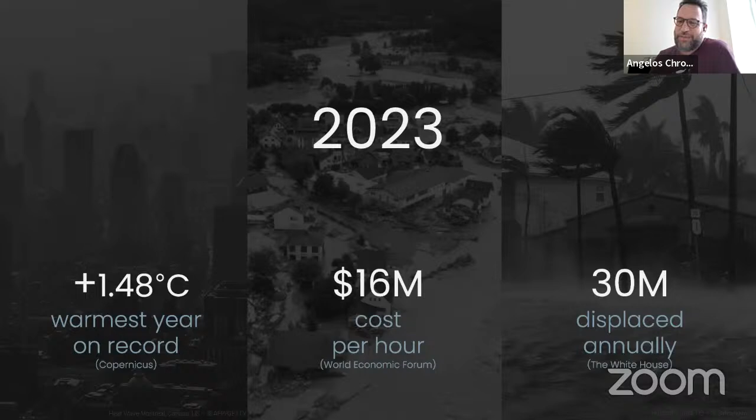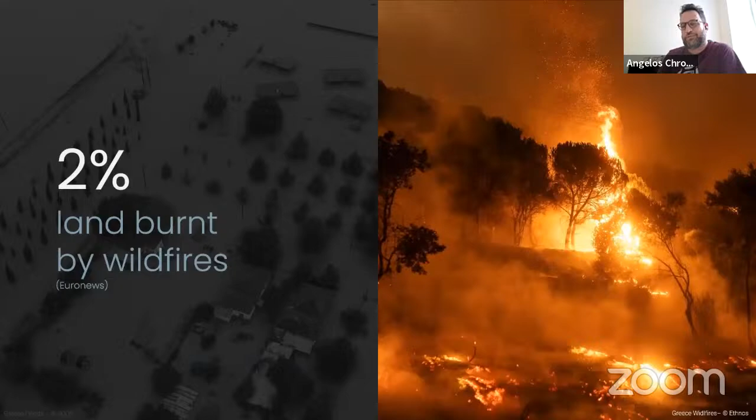We're really in trouble. I come from Greece, and I normally use these stats from last summer in Greece: we lost 2% of our land in wildfires and 5% of our GDP in floods. So we do have a problem.

I'd like to bring us back to that problem as we develop cities, and cities are the core of this problem. 75% of us will live in cities by 2050. We need to build 13,000 buildings per day by then, according to Autodesk. And buildings are still the largest contributors to climate change, with more than 35, sometimes 40%, of greenhouse emissions.

Cities occupy 2% of our land but consume 80% of the world's energy. I like this image because it focuses specifically on the buildings that are the problem. Most of you probably know the Walkie-Talkie building in London, also called the 'Scorchy-Talkie,' because it was scorching very expensive cars in the city of London, and essentially had to be adapted to stop melting cars and people's property. It wasn't the only time this happened in the history of architecture.

Viñoly made the same mistake with the Las Vegas Vdara Hotel, where people working there called it 'the death ray' - a beam that passed by the pool area and burned people, and melted plastic cups. If we're in 2010, now 2024, and we still can't figure out that a building will burn people, we have a problem.

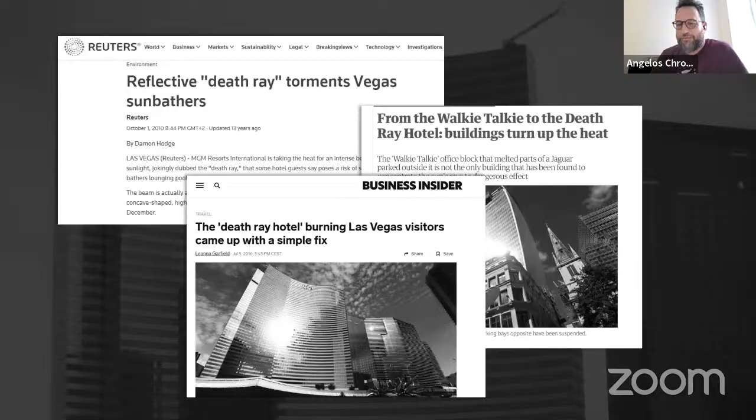I want us to go back in time a little. This is generative components, from maybe 15 to 20 years ago - probably shows my age a bit. Back when generative components were essentially the parent of Grasshopper, when it was parametric architecture before we got into the spaghetti we have today.

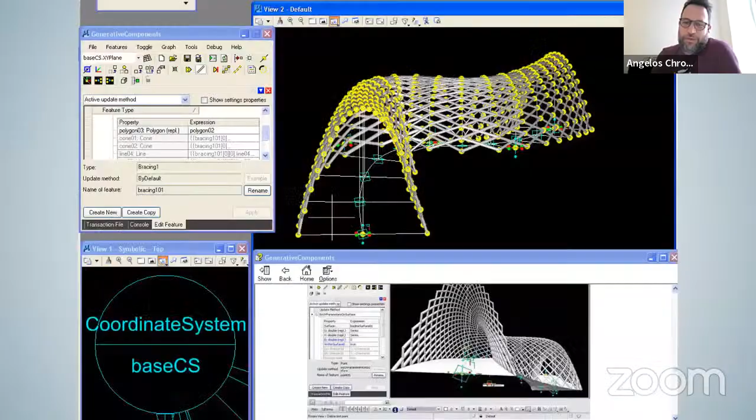So we went from here to there. This is a very interesting image from the past for me, where we have a free-form surface connected directly to a solar radiation calculation done in Ecotect - a custom GC to Ecotect link. It took me about two weeks to try to connect the two together, and it wasn't even possible. Today you go to Food4Rhino and get simulations for all sorts of things. So we've come a long way, but we still have a long way to go.

Now, when we talk about AI in architecture, it's not that relevant to me for Midjourney and visualization - it's more relevant to what we can do in terms of performance in architecture. How do we understand the impact our design has on the climate? This has been the most important driver for my career: how do we connect design to all the different climate aspects, whether it's wind, solar radiation, thermal comfort, rain, or anything else?

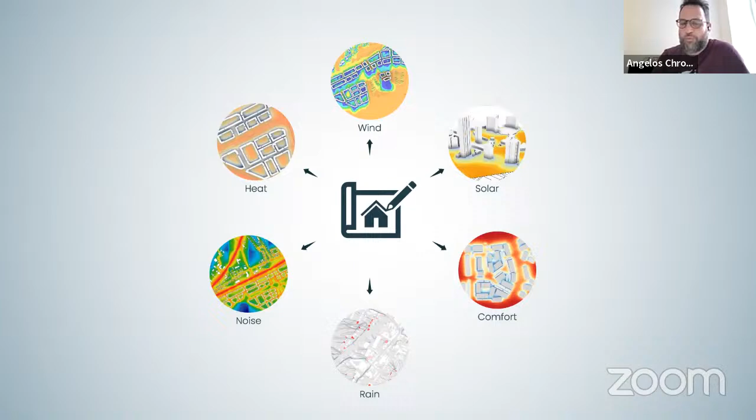That's how we came to discover the problem: these simulations aren't really connected. Even with tons of tools in Food4Rhino, you still have time, complexity, and expertise issues. Infrared.city, the startup, is essentially focused directly on this problem - making climate simulations accessible.

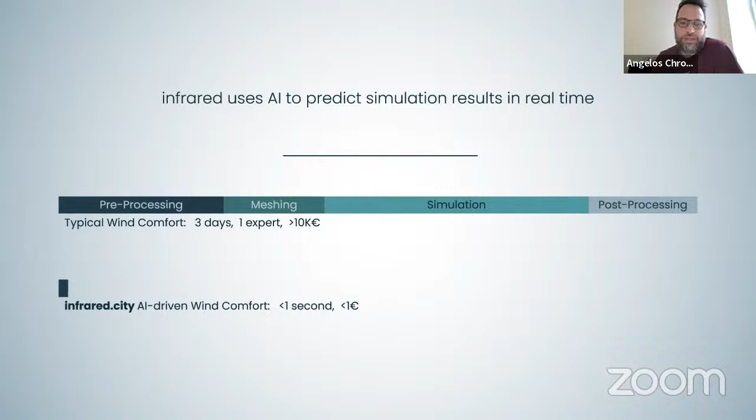A typical example: if you want to do a wind comfort simulation, it takes 3 days. We can do the same simulation in less than a second.

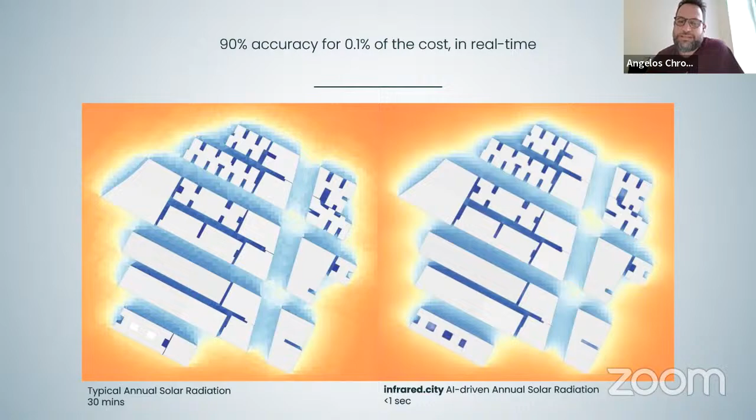This is a very interesting image for me, one of the first we developed in the project. On one hand you see a solar radiation simulation that takes maybe 30 to 40 minutes. The other is an AI prediction done instantly. What we've been developing are generative adversarial networks, GAN models, that can predict simulation results - and since then we've done a lot of work with other models as well.

Essentially what you have to do is run thousands of simulations. We create workflows where we run thousands of simulations to train a neural network to predict the simulation results. But before I continue, I'd like to go back a little to the CIL, where all of this was born.

The CIL is the lab of the Austrian Institute of Technology, where I was heading for the past 5 years, and where we developed, together with Yosha - I think it was also with you two weeks ago - a lot of these tools, as well as infrared.city. I'd like to talk a bit about how we use generative design and AI-driven design tools in the lab, and how this gave birth to infrared.

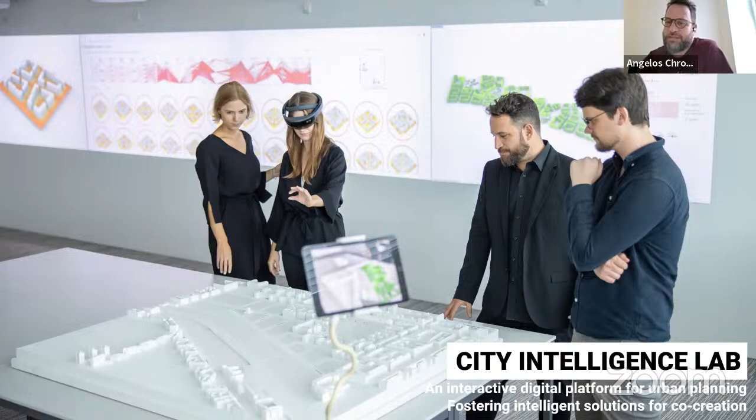The City Intelligence Lab is a laboratory within a larger research institute that tries to bring together all the different expertise and aspects: mobility, climate, transportation, and energy - all the different aspects of design together. The lab is where it all comes together through interactive, integrated tools. One thing we developed, which a lot of people might know, is the Decoding Spaces Toolbox, led by Professor Reinhard Koenig, who was also leading the group. It's a toolbox that allows you to quickly design urban forms with the help of generative design methods.

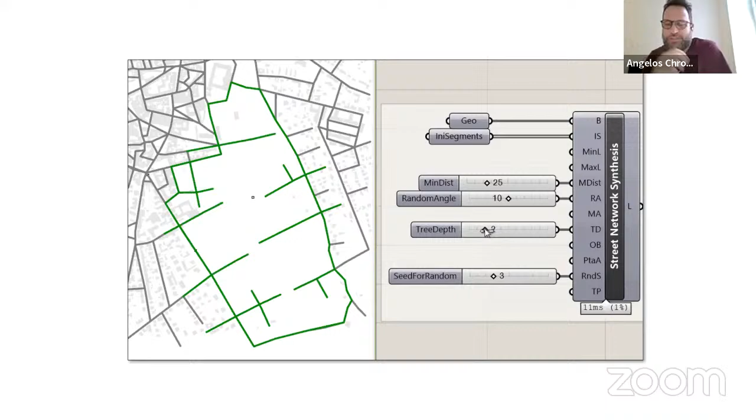So essentially you take a plot, and you can generate street layouts, you can generate typologies, you can essentially very quickly build master plans and play with urban form without really ever manually designing anything.

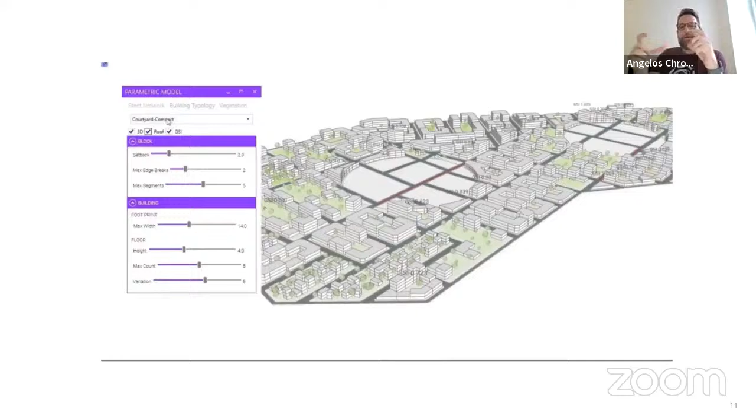This is, for me, a very interesting video that shows how you can sketch essentially urban form. This is done by Rayed Mohammed, who's now leading the computational design team at Henning Larsen. Essentially you can see how you can very quickly sketch urban forms, quickly play with designs without ever designing anything manually.

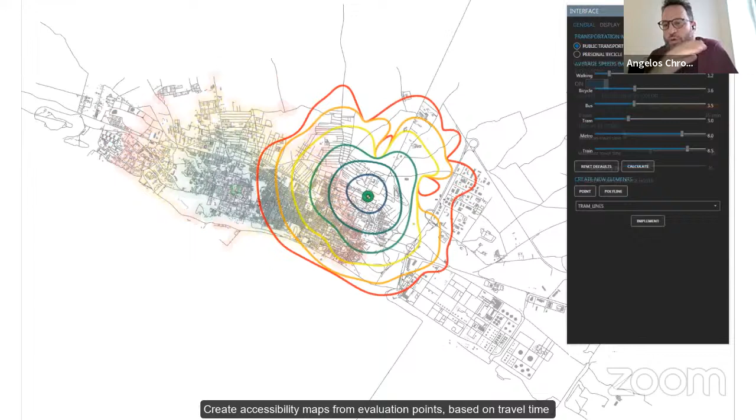We also went into mobility and accessibility, putting a point in the city, figuring out what you can access. All of these tools are developed within Grasshopper, custom tools enabling performance-driven analysis of the city, like quickly playing with transport networks, changing stations, adding, removing stations, etc.

So that essentially is what led to Infrared, this idea of having these simulation tools that take a lot of time, and how we can speed them up. That's essentially what we did with Infrared.

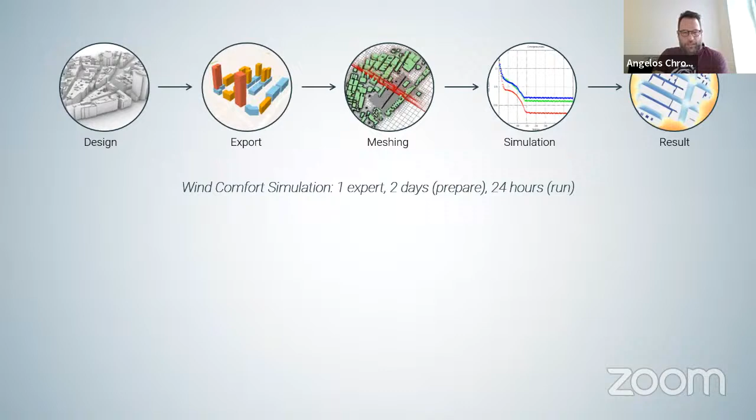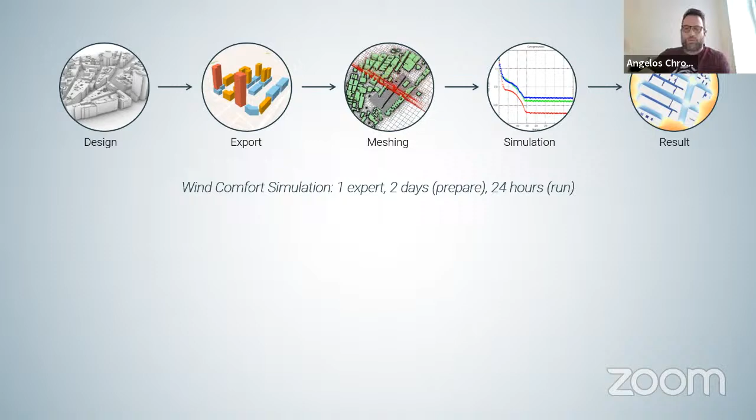We take something like a wind comfort simulation, which is a very complicated process that starts from designing, exporting, meshing, running a simulation, bringing back results, to essentially going directly from the design to the result. That is essentially what we developed.

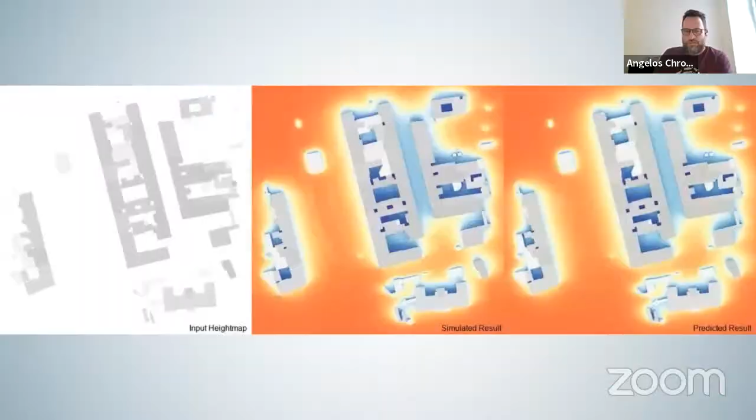So again, back to this image - how do you develop such a tool? You take cities like Vienna, you generate 3D models, you run thousands of simulations, and you train these adversarial networks to predict the simulation results.

There are a lot of such examples out there today, but we were one of the first to really use AI for this simulation prediction modeling.

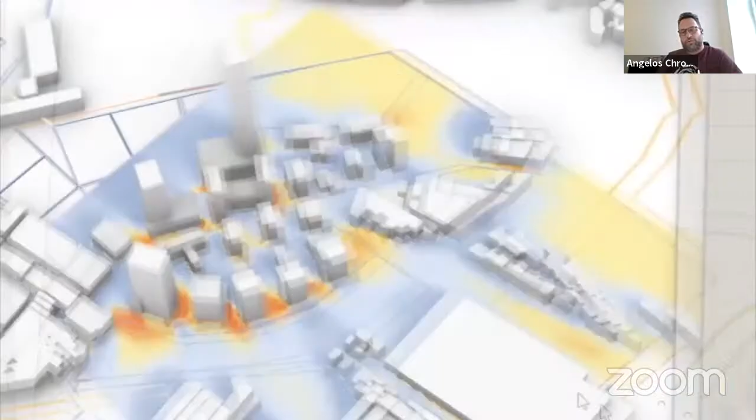I'm going to go directly into showing you a bit how Infrared looks on the different modes. Currently you can access it through the cloud, through a plugin, through the web API, or any combination of those. This is essentially a mashup of all the different methods.

This is Infrared in Grasshopper, so you can literally take a building, move it around, and immediately get a simulation result. And of course that allows you to generate massive solutions, massive design iteration.

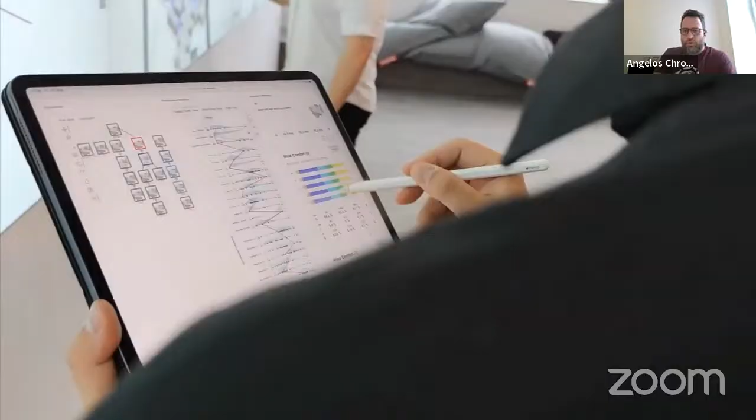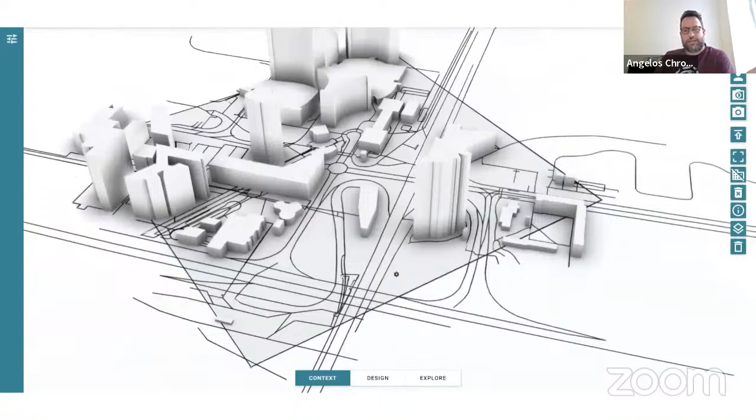This is the cloud app. You can go to a specific location, for example in Vienna International Center, where you can get data from OpenStreetMaps, very quickly select your area, select your site, and then I want to show how you can very quickly generate simulation results for wind comfort, solar radiation, etc.

For a tower, for example, in just a click of a button. And again, going back to AI, I know most people are used to seeing generative imaging of dreamy landscapes.

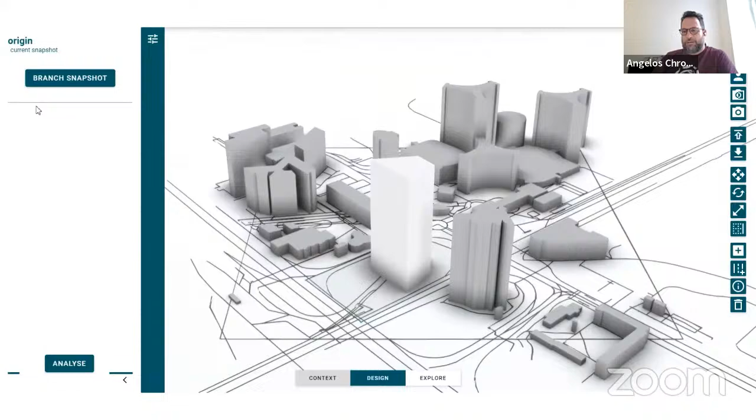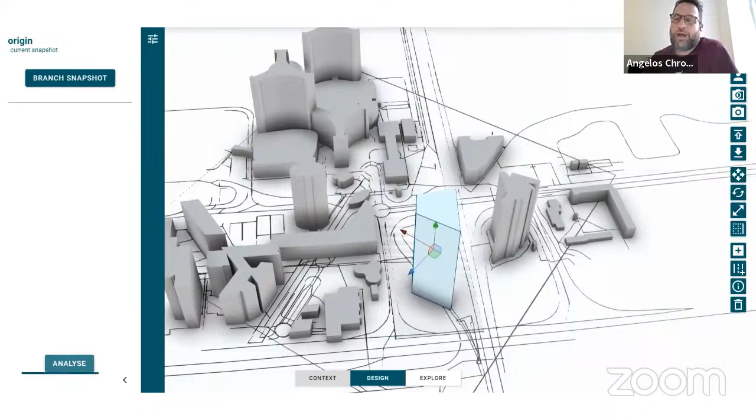But having a wind comfort analysis in a second is something we've been trying to do for a very long time in this field, and it allows you to really understand how your building impacts the environment - which is something that will happen, since this building will be built, and it will have an effect on everybody's environment.

The Grasshopper plugin, looking at parks in this case - you can move this park around using this generative design capability, where you just place a point and a park is generated. You can move a street layout, and masses are generated using decoding spaces in this case.

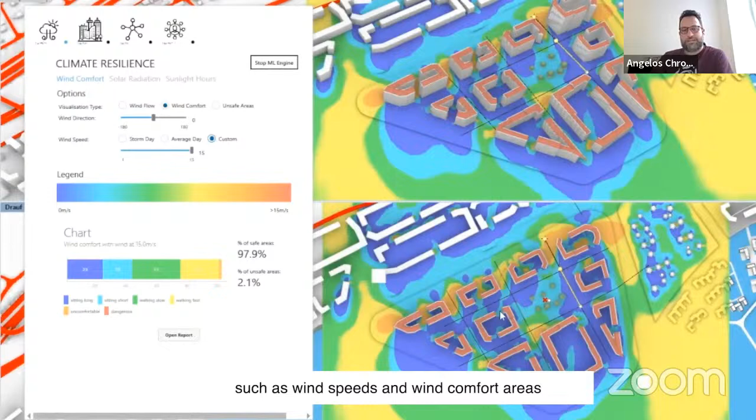And what you see here again is immediately having wind comfort results accessible to you through AI. This immediacy is again something that was not possible before. I've never seen this before in my career - I've worked 15 years now, and CFD was trying to do this for a very long time. So I was really glad to see it.

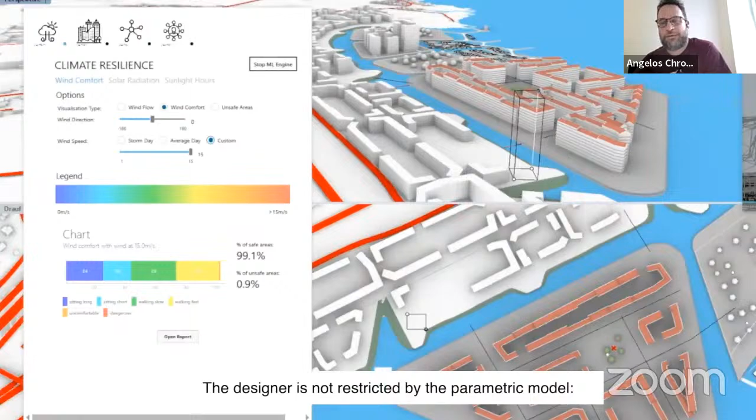You can also change buildings, add buildings, etc., and immediately see results. So that's essentially the power of Infrared. I don't want to spend too much time on it - we've also used Infrared through Speckle within Revit.

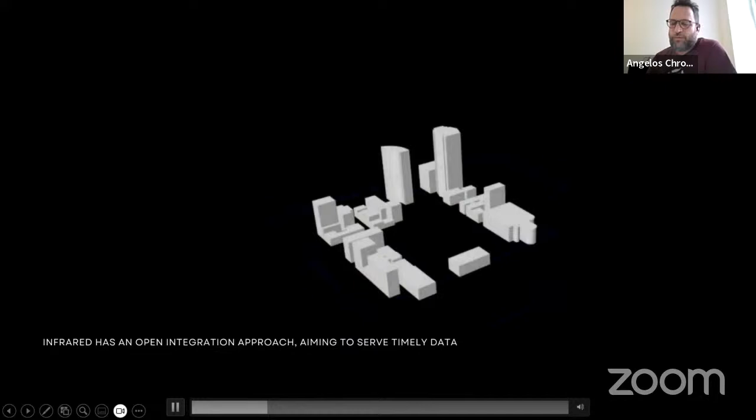I'm going to skip through this, which also shows the power of Speckle and integration of data. I don't know if you've spoken to Dimitri Stefanescu, a good friend who has done a lot for this industry's interoperability of data. Here's designing something in Revit and very quickly moving it to Infrared through Speckle and getting a simulation result. I'll skip through that since we don't have much time.

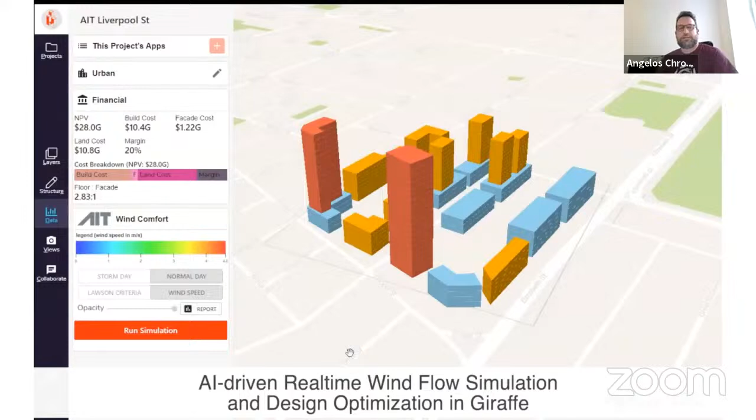Finally, we have an API, which means people like Giraffe, for example, can take our simulation and directly integrate it within their own tools. That essentially allows us to open up simulation as a service to everybody who wants to integrate simulation results. I'll show very quickly, since we're short on time, what this all means for really designing a project.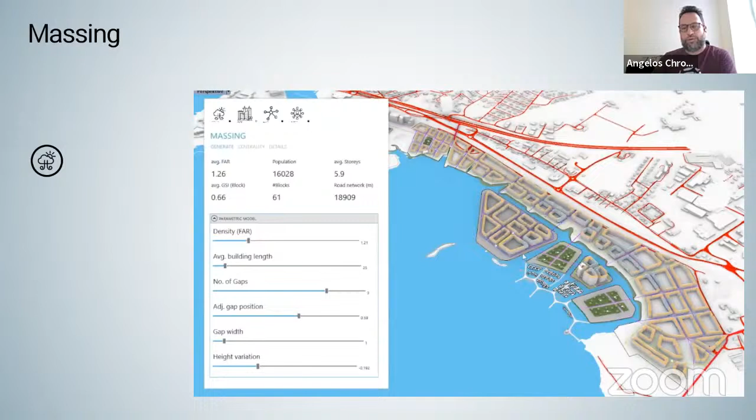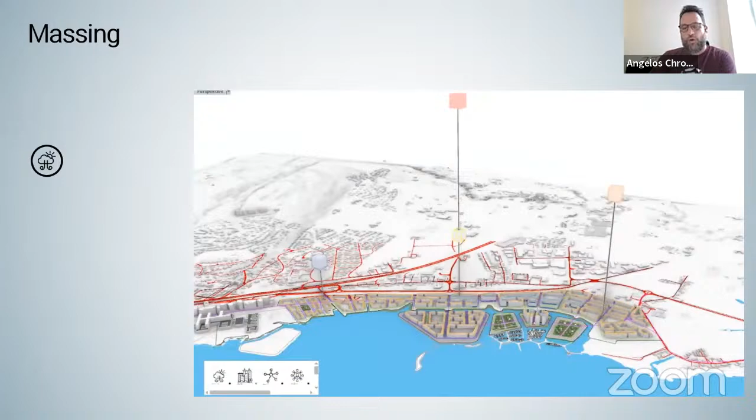This is a collaboration we did with Link Architecture, a Norwegian architecture firm, looking at a master plan for waterfront redevelopment. You can use quick massing from design, from decoding spaces which I talked about before, moving density in and out of that massing. Every time you do that, you're generating a solution that also generates performance maps - solar radiation, sunlight hours, daylight, accessibility, etc., all with the power of AI. This is again where this idea of moving the park around comes from.

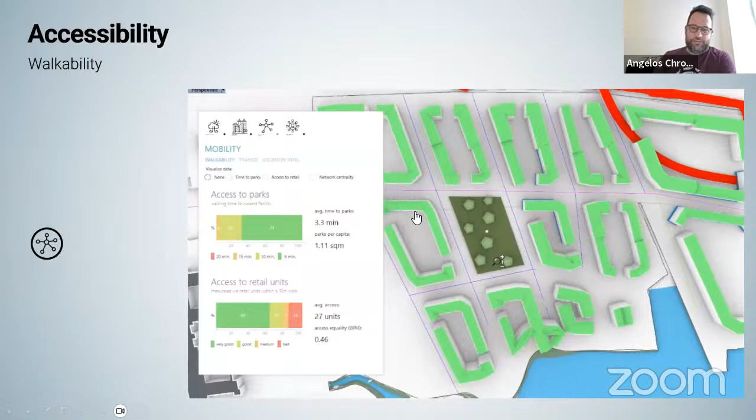But every time you move the park around, you're also changing the accessibility of that park. So you're connected to figuring out how quickly people can get to that park, and how many parks are available to every citizen in this new development, or things like mobility, transport stations, etc.

Sorry, this video was not playing. I'm not sure why. And then even looking at things like noise. I think I'm going to have to restart my presentation. Give me a second, because something has happened here, which is weird. Okay, share screen. Let me know if you can see that again.

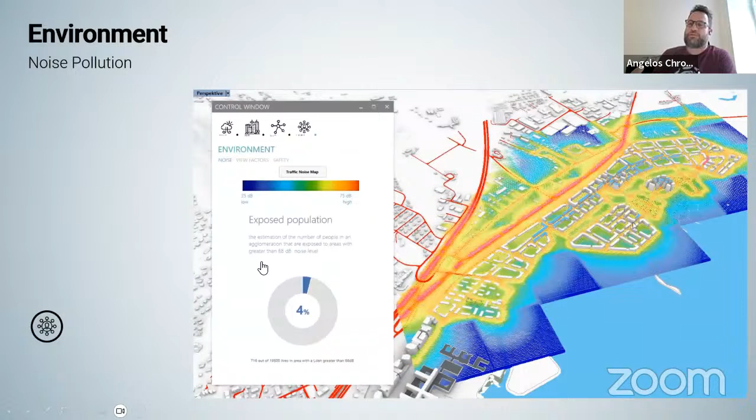Yeah, you're good. Okay, so like noise, and I was looking at mobility before, so essentially moving transport stations. The idea of having an integrated design approach where every time you make a decision, you're actually able to see the effect of that decision in every other aspect.

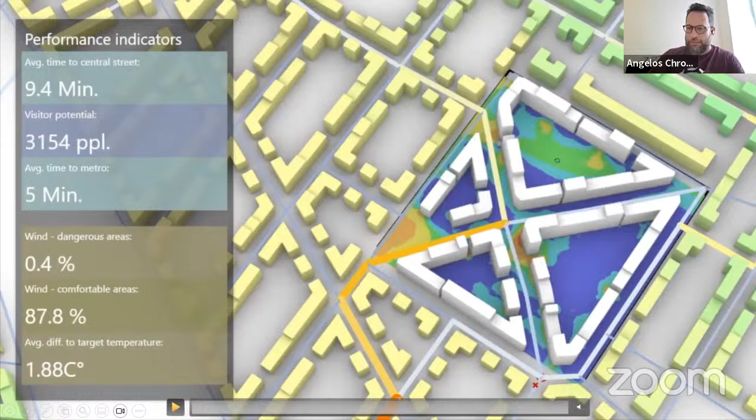I'm going to stop here for a second and show what I think is the power of AI-driven design, generative design in the future. I really like this video we did together with Yosa and others in the City Intelligence Lab, where we're using infrared, using the power of AI-driven simulation, but at the same time using things like reinforcement learning or other AI models to very quickly find the optimal solutions for a specific quarter.

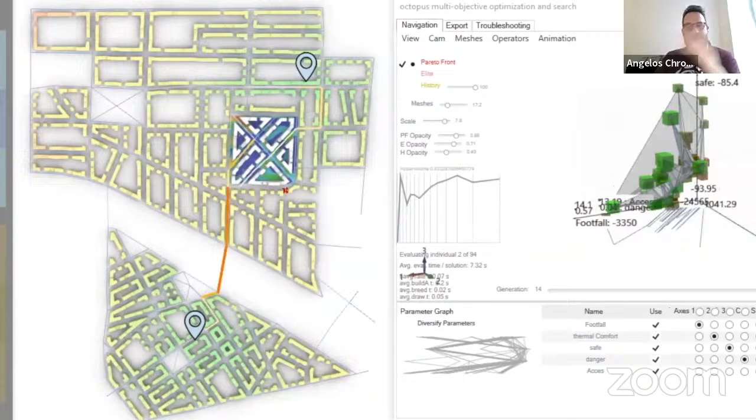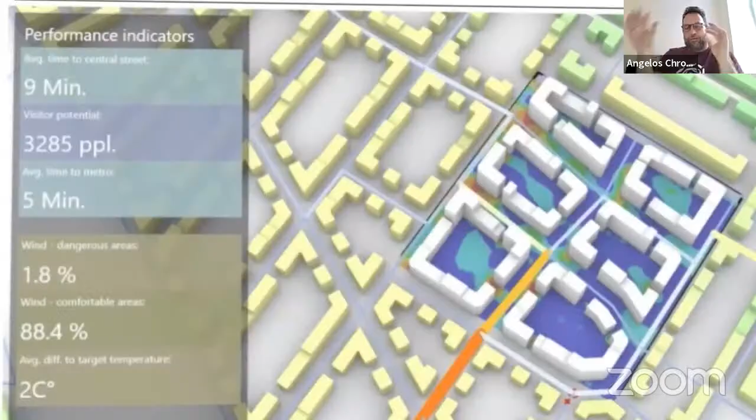It's an urban design project, but you have certain objectives - thermal, wind, footfall, accessibility - and you run thousands of simulations and thousands of designs together, and you're able to very quickly figure out which ones are the best. But even when you do that, you want to continue with the manual design and bring that design back to the table, the negotiation table, and start playing with the design.

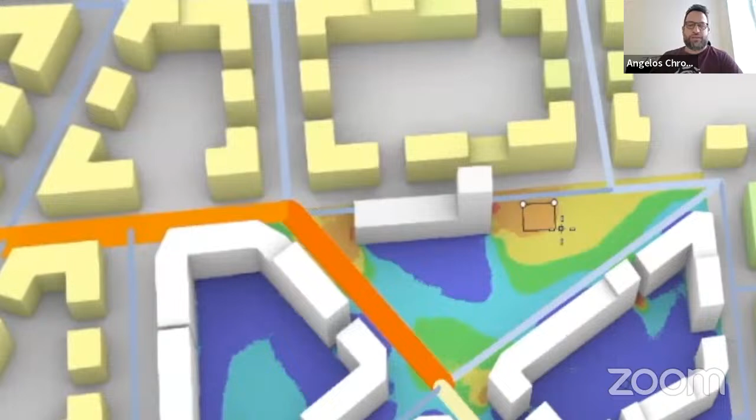And here's where AI comes into play. We talked about my background playing with AR, VR applications, and I think this is one where it's actually interesting to use AR, where you bring back the design. You say, but I actually need a tower in this area. What happens if I bring that tower in? Then you send that design back to the machine learning, reinforcement learning process, and it can find the optimal location for that extra tower.

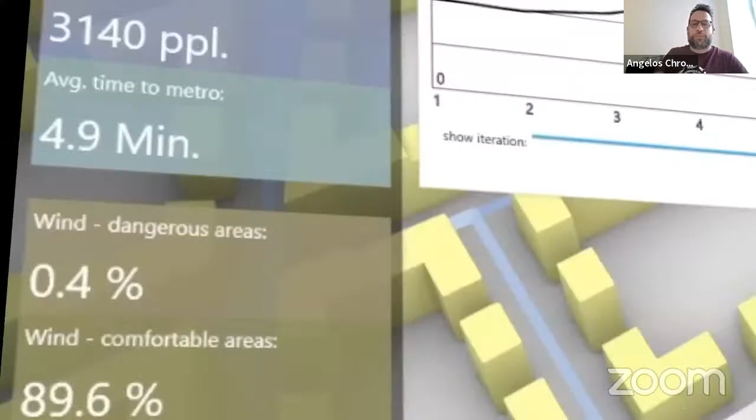This play between the human and the AI is where I think the future of AI-driven design is. It's less about AI bringing you a design and you trying to replicate the dream - more about you negotiating, having this idea of AI support in every design decision.

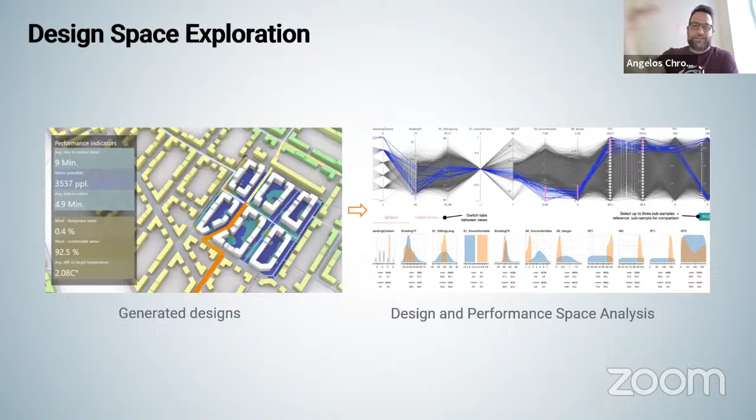And talking about design space exploration, there are 1,000 possible iterations for any specific design - how do you really go about playing them? We had design explorers, other tools like that in the past, but now the idea - and this is what Joshua is working a lot on - is to go from the complex to the simple, from generating thousands and thousands of designs to actually being able to negotiate these designs.

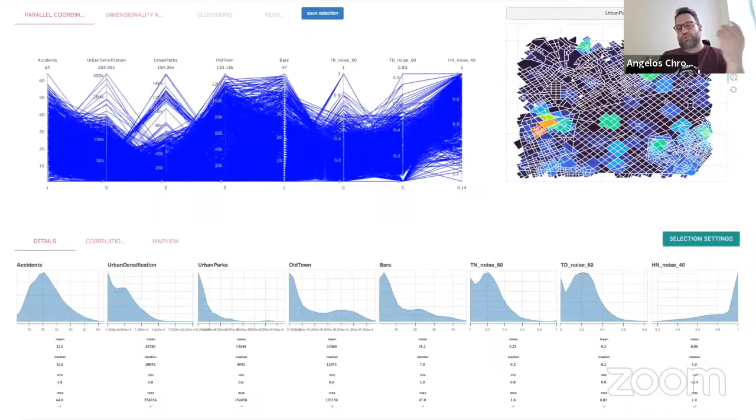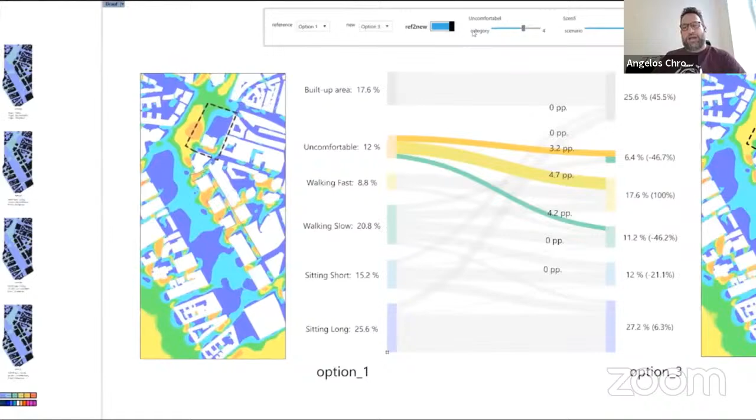I'm going to skip through this part because we don't have much time, but one of the things we've done a lot in the CIL is create interactive, intuitive interfaces to allow the designer to really play with data, to select certain things within, in this case, an SOM map, or interactively look at areas where CFD wind is performing more or better, and then play with this data to come up with decisions.

Finally, I want to talk about something we mentioned before - this is essentially my favorite project. I want to talk about Treehopper, which is a potential future of AI-driven and augmented reality design tool, where you get essentially a participatory planning tool.

This is Average Joe - it's actually one of our colleagues. The city of Vienna has a mandate to plant 25,000 trees in the next 3 years or so in the city. Average Joe, our sort of user here, goes on to Treehopper and decides where he wants to plant those trees in the city.

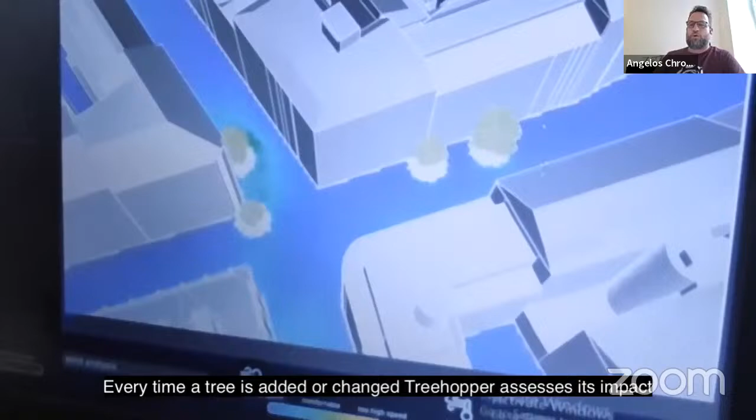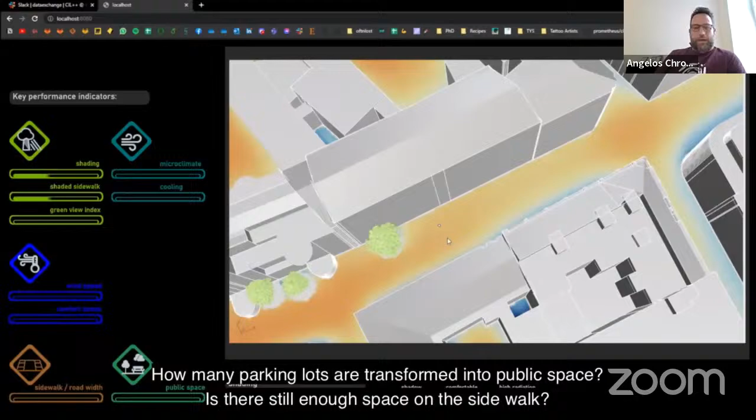Every time he adds a tree, he essentially sees the effect that tree has on the street where he's planting it. So it's not just about where I want the tree to be - I want it next to my car so it's shaded - it's also about understanding at every iteration what effect that tree has on the climate.

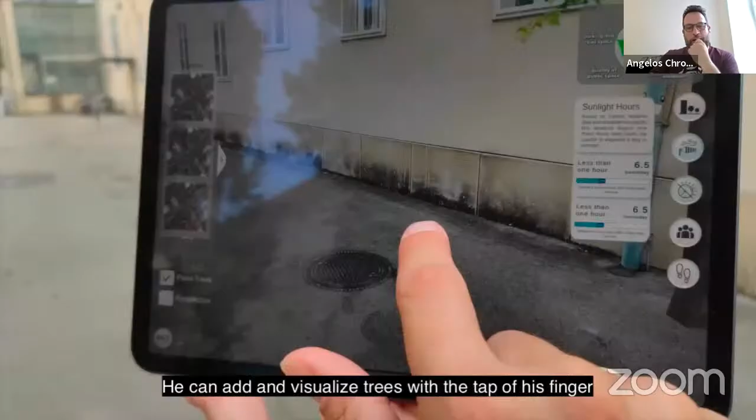Then you go in situ with a tablet or phone, and this is where I believe the future of design will potentially be. You can actually plant that tree, see it in front of you, see what it looks like, and at the same time understand the metrics - how much it makes the situation there better. Of course, the city can also look at these designs, figure out which ones are best, and come up with solutions.

So I'm going to stop there, because I want to have a discussion with you.

The last thing I'd want to say is what we're doing at IUAV with the new masters is focusing on exactly these topics, bringing a new idea to architecture education where we ask the industry to bring us the challenges they're actually looking for. We bring these challenges to the students, ask them to come up with solutions, and then they get hands-on experience through an internship with these industrial partners, and hopefully, in the second year, develop their own ideas as a startup and get funded to continue further.

In a nutshell, perhaps the whole presentation is a bit confusing, but what I want to say is we need to change the way we see ourselves as architects, as planners, as designers, and escape the code-monkey model, if I may say, where we go to a big firm, big name architecture firm, and essentially work for one mind's solution. We need to go to a different mindset where we all collectively come up with new solutions, new business ideas, new strategies for how to build more sustainable cities, because it will not come from some genius mastermind.